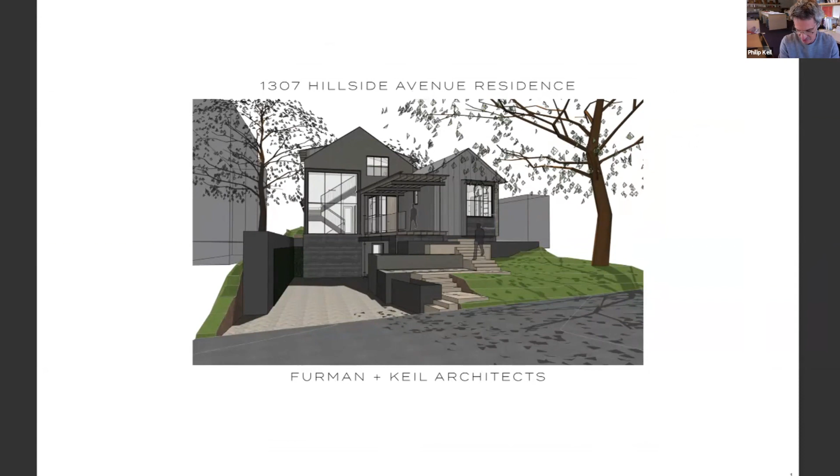This was a special project for us, and I'll introduce our team and then let Drew and Troy take over. Mark Whaling with, you guys probably all know Mark because he's been a long time advocate for and supporter of AIA Austin through his company, Austin Concrete Development. In fact, I got to know Mark through AIA Austin, and he ended up hiring our firm to help him and his wife design a house over in Travis Heights on Hillside. So today we're going to be talking about that house, really talking about the design genesis of it and all the crazy forces at work in the constraints, particularly the very constrained urban site.

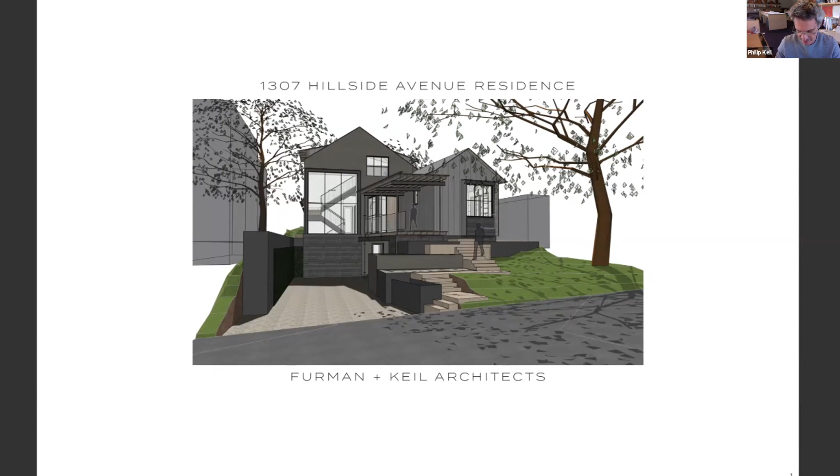But we'll get into that in the presentation. I really need to give Troy and Drew props on this. Troy and Drew from our office really took the lead on designing this house, making it really sing, integrating with our amazing consultants, including Sam Covey from Fort Structures, Blair Burton Interiors, and Jose Corea from Austin Outdoor Design. Them paired with Mark and Rosemary, fantastic clients, really made for a great project, very integrated on a very challenging site.

One note about our clients, because they're kind of the reason we're all here. Mark is unusual as a client for us because he's a colleague in the trades industry, being a tradesman, he kind of knows the construction industry. He was not only our client for this, but he also acted as general contractor. So I'm sure you guys will have interesting questions for him as we get into it.

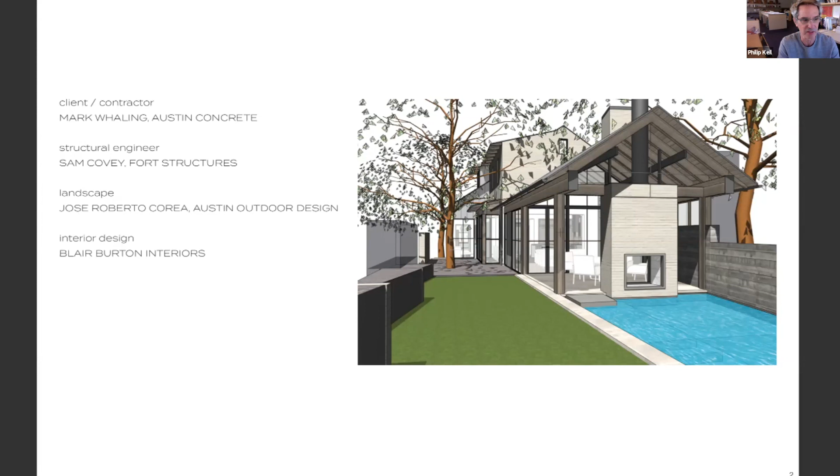Thank you. Our clients have been looking for a perfect spot to build for a long time. They had lived in Toronto and wanted a location that had an urban context, but still felt like a neighborhood. They also wanted to be able to walk out the front door and be at shops and restaurants within minutes. And when this lot on Hillside in Travis Heights came available, they moved quickly to get it.

It had an existing small bungalow that was removed to make way for new construction that would take better advantage of the lot size. This starts to show the feel of the neighborhood with the tree-lined streets and smaller older homes on irregular shaped lots. There are several new builds mixed in as well. Notice the wedge shape of the lot as it narrows from the street to the back, and it also rises several feet in grade from the front to the back as well.

This slide shows the challenge of the context of the neighborhood. We have a smaller, older bungalow to the right of the property and a large new construction to the left of the property. We really wanted to find a strategy that split the difference in scale and still fit in the neighborhood.

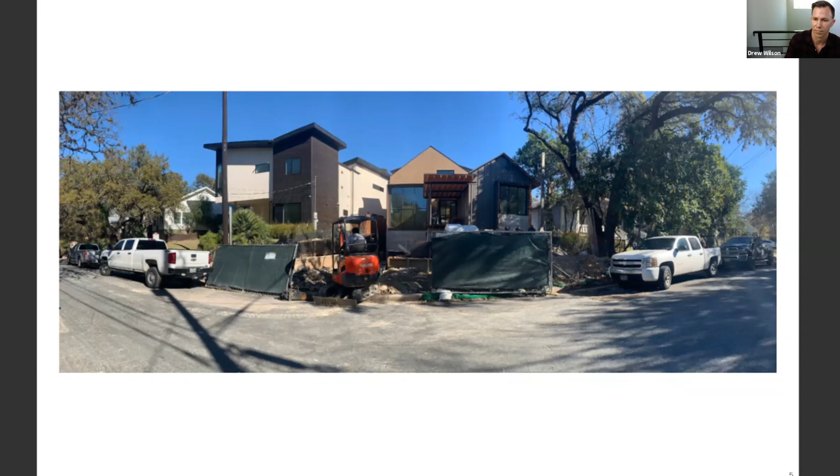My name's Troy. So when we were starting the design, Mark and Rosemary came in and really said, we want the master bedroom on the back, the private part of the lot. We want the living spaces towards the front of the lot that can engage the streetscape.

So we started looking at all the overlays that you get on these urban lots. The second constraint we had is that there's about 15 feet of rise across from front to back as this lot narrows towards the east. And how do we take Subchapter F and all of the overlays and zoning and max out this lot?

Another thing the clients were looking for was not necessarily a traditional house, but some of the traditional elements that make an older neighborhood like this, and the bungalow to the south, part of that streetscape. Ideas of front porches, exposed eaves, gable roofs, not flat roof structures.

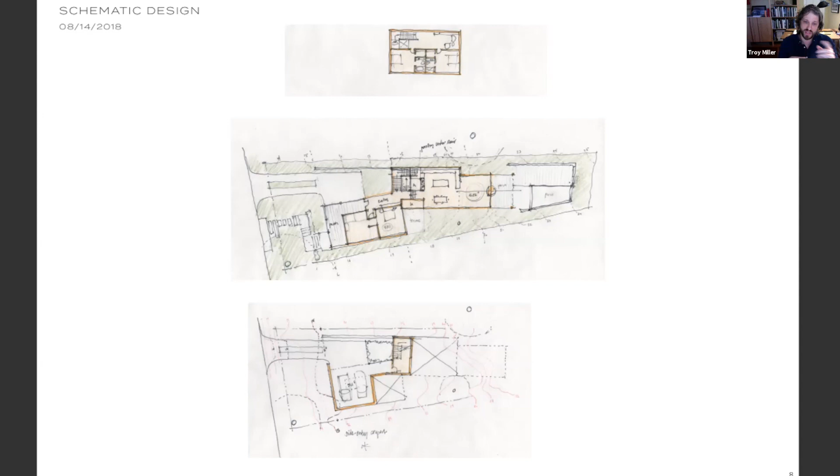The next step was looking at how we're going to mass this structure, and whether there are ways to clean up the geometry so they're a little more integrated - where before it was two orthogonal structures oriented to the two divergent property lines. Can we take those two geometries and start weaving them together, which is what we started to do here.

As we went through this process, let's go to the next slide, which is just the upper level, starting with this cut-in basement level.

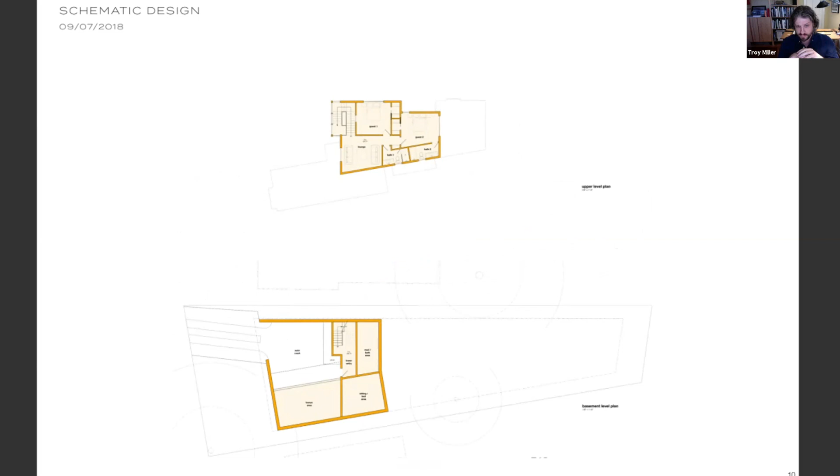So how do you start to layer this structure and use those different elements, not only horizontally in plan, but vertically, and tie them together. Let's go to the next slide.

And the goal was that from the street side, it really is perceived as a 1-story structure, that master wing moving up the hill to this reconstructed front porch.

It's on the front of the house, but it doesn't necessarily face the front of the house. It brings you up to an entry that's very clear, even though it's 10 feet out of grade at the street from the streetscape.

And also, this will become more apparent as we look at the 3D, we have these walls that are vanishing to a point towards the back of the lot. And how do you put a roof on that gable roof structure and make it feel like those older houses?

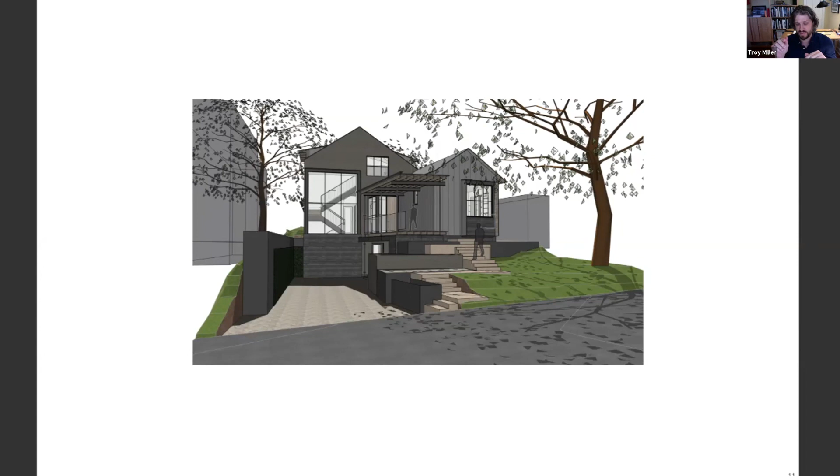What we found out as we were modeling this is, if you just keep the plates the same, these roofs can crawl and become gables that come out of gables, and your ridge line ends up sloping, but you really don't ever perceive that as you're moving around the house. So in a lot of ways, it feels very regular.

And that allowed us to achieve, if we look at the left of the page, that lower roof gable of the master wing comes and really slides up into that larger gable over the 2-story structure.

And then within Subchapter F, starting to use all the tools of dormers and what those are allowed to do, to slip it under the tent.

The other element that we were trying to do is keep the mass of the house in the center. And as we move out to the places where you exist outside of the house, the structure becomes a one-story element that's at a much more human scale.

So when you're up against it, even though part of the structure is 3 stories and a very large volume, when you're outside, when you're engaging the house in the spaces within, you never really feel that, except for maybe the one point at the stairwell, which is really that vertical connector through the house.

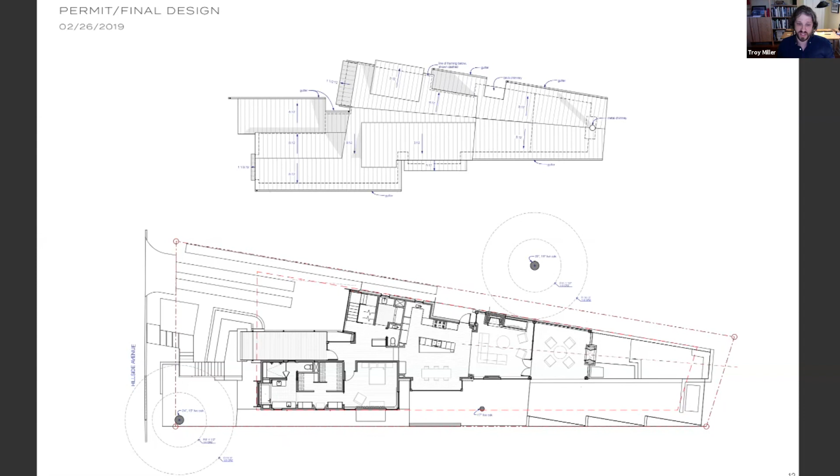And as you can see, as we went through this process, the basement actually allowed us to add additional elements as we moved through. So the program became even bigger when we got to this point.

Just by twisting the building into the regulations, particularly the basement relief from FAR, allowed us to have a guest room, a storage area where we contained all of our mechanical equipment, a bathroom if you enter off of that sunken level, and even a media room on the upstairs level for the client.

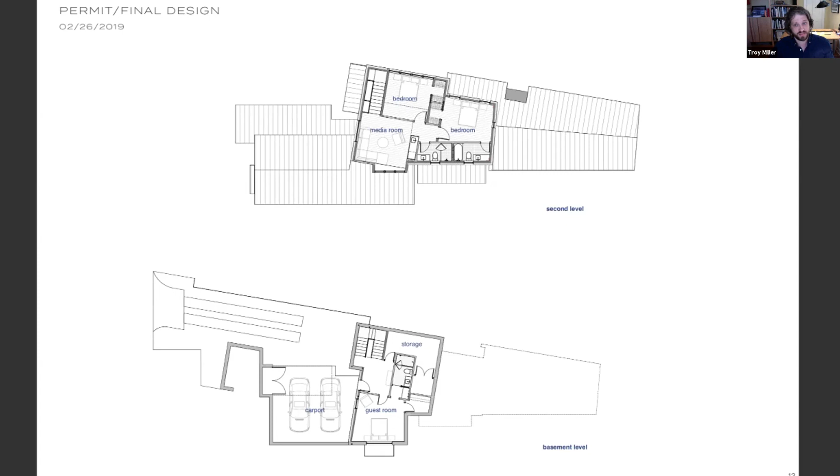And if we go to the next slide, this shows the tent and how we slipped all of these structures underneath it.

One idea was that as we got into this upper structure, to keep the scale down, we really use again those gables to reduce the additional size that the 3rd level adds to the project, by breaking it down into dormers, and it being fully functional, but it has a little bit of it slipped into the attic, even though we weren't using the attic exemption for FAR.

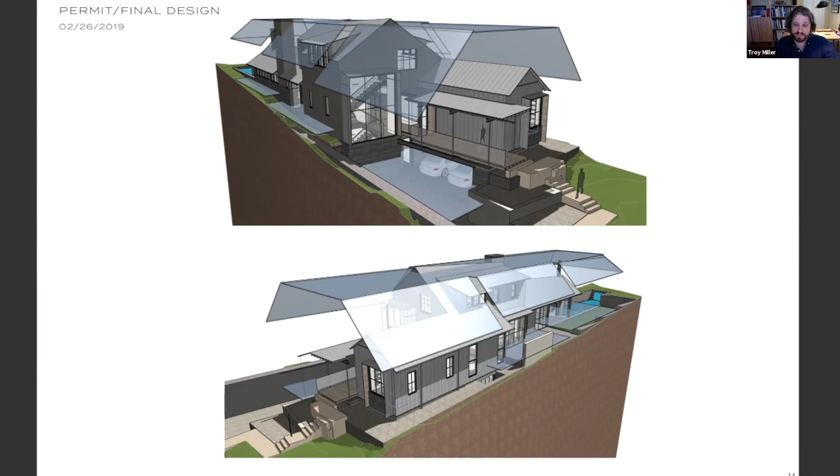And you can also see in this slide how it lays out the square footage we were able to gain really by using the basement exemption, from an allowable square footage which was right around the 2,800 to 2,900 square feet of FAR per building permit that we had.

Really, the house itself has, in that 3,600 to 4,000 square foot range of interior conditioned space, that is really what people want out of these urban lots, I think, just because of the cost. It's really hard to get all of the function and programming they want out of that structure.

This really shows how we stepped up the lot. We ran into a bunch of issues in terms of how basement is calculated, how tall the ceiling heights can be on that lower level, and still get that continuous main level from the master all the way out to the living room and the outdoor room, and how much we wanted to cut on the high side of the lot. So through discussions with the Whalings, they gave us 2 steps.

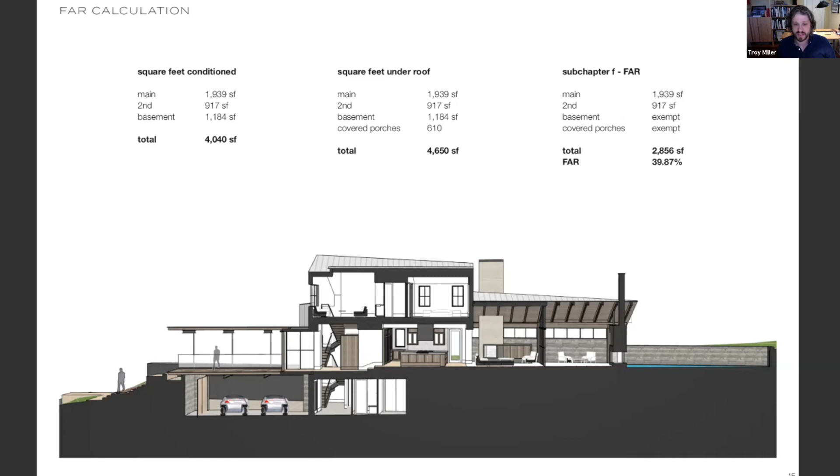If you want to move on to the next slide - this sort of shows that stair as the circulation volume, how we tucked it in on that upper level where we had some low plates, but it still provides, I think, some nice and interesting geometries.

These geometries are cleaned up just enough that the house feels comfortable, and you don't necessarily perceive the craziness created by having the walls that splay towards each other and the dipping ridge lines.

Just to the left of the stairs, the entry door - part of the issue was getting people past the master, and once you enter, you sort of see all the way back through the dining room, through the living room, out to the outdoor room, even to the pool. So the natural flow is to move away from the master suite.

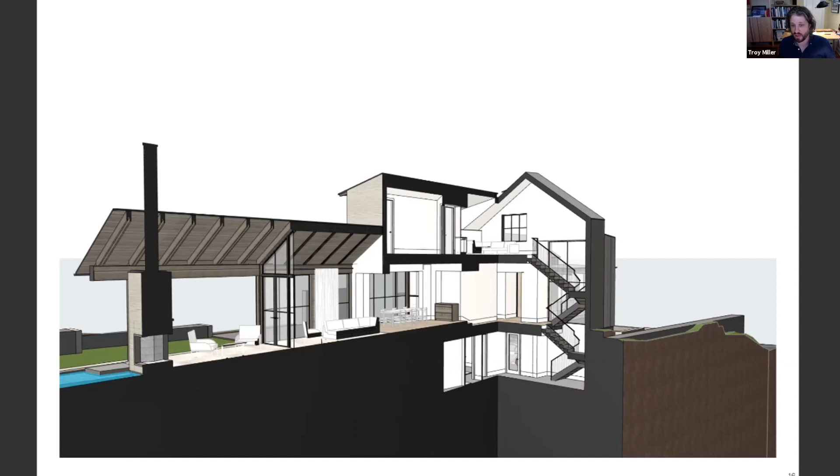Again, this maybe shows a little bit more of the stepping down of scale as you get to the back of the lot.

Really, the living room and outdoor room are one part of the mass of the structure that drops down to sort of a one-story pavilion. So when you're outside in the pool or in the smaller yard to the south of the structure, you're really just next to this one-story building.

Ideally that's a very comfortable space, where with all of the glass on the living room, that whole area feels like one space.

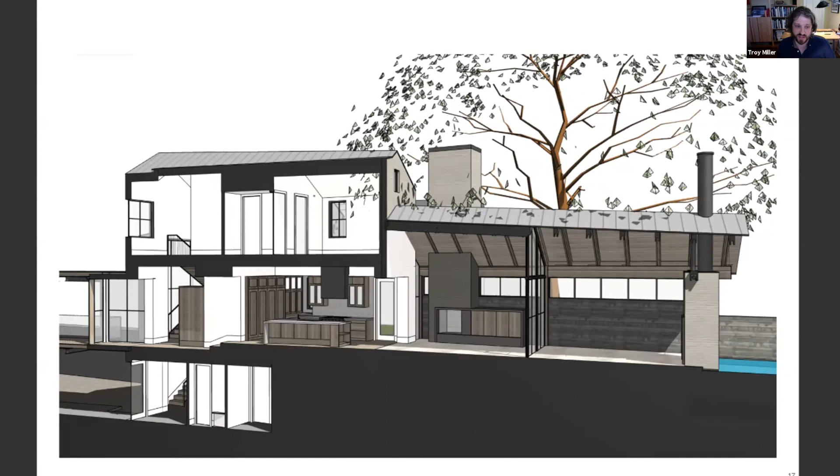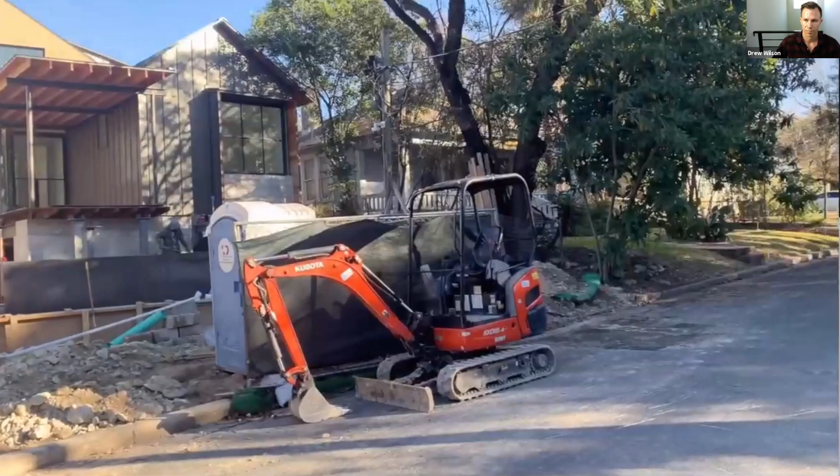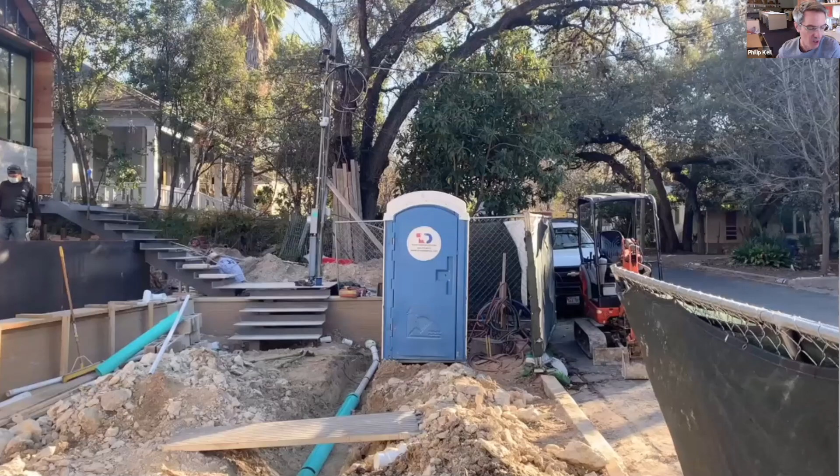That house right there was on a homes tour a couple of years ago. Here we are on Hillside Avenue, with the steps leading up to the front porch and the driveway cutting down into the site to the carport.

This is the front porch entry, which is up off the street, 7 feet.

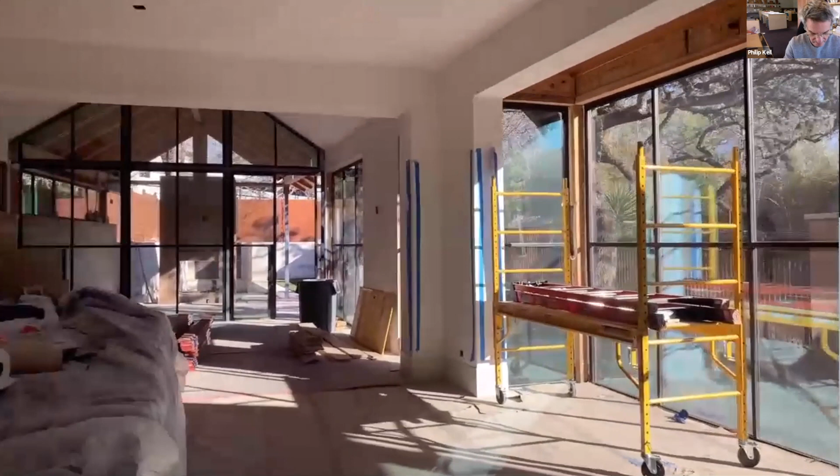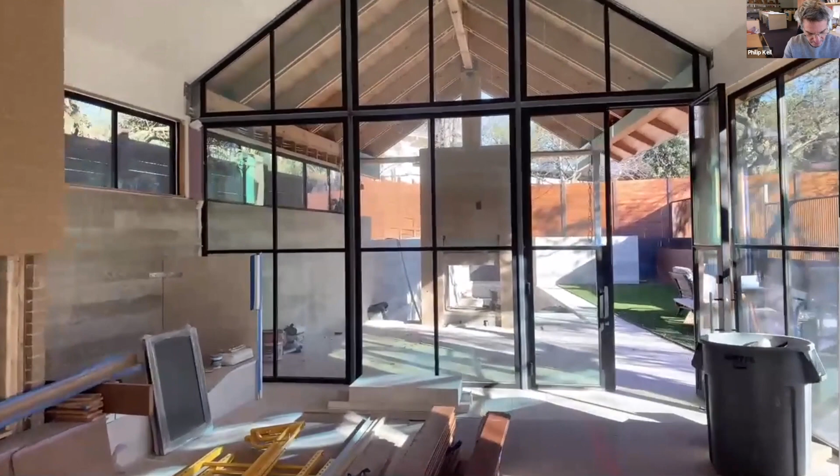This is the entryway, which leads into the dining room and the kitchen, then into the living room, and flows out to the back porch, backyard, and the pool.

And this is the master bedroom, and the master bathroom.

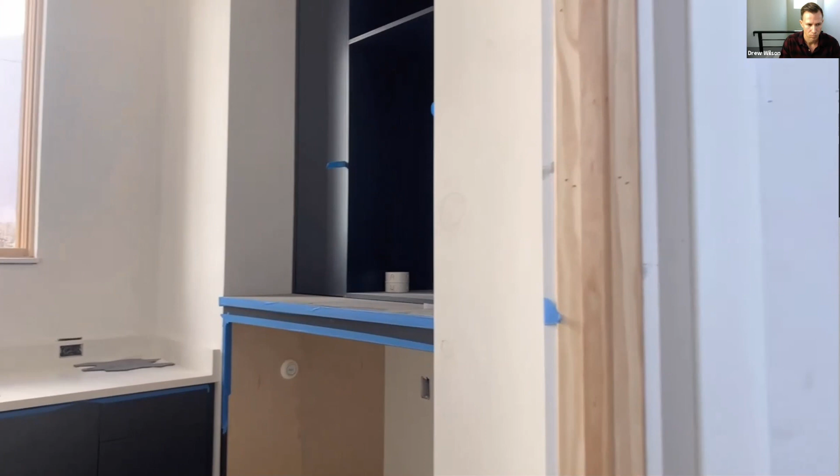To the laundry room, powder room, coat closet, and then there's the stairwell that goes from the bottom floor all the way to the second floor.

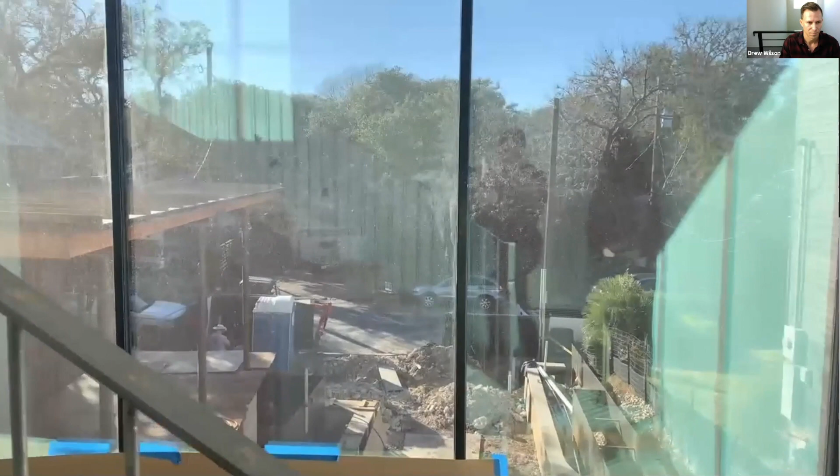The second floor has a small media room with a wet bar, and 2 bedrooms and 2 bathrooms.

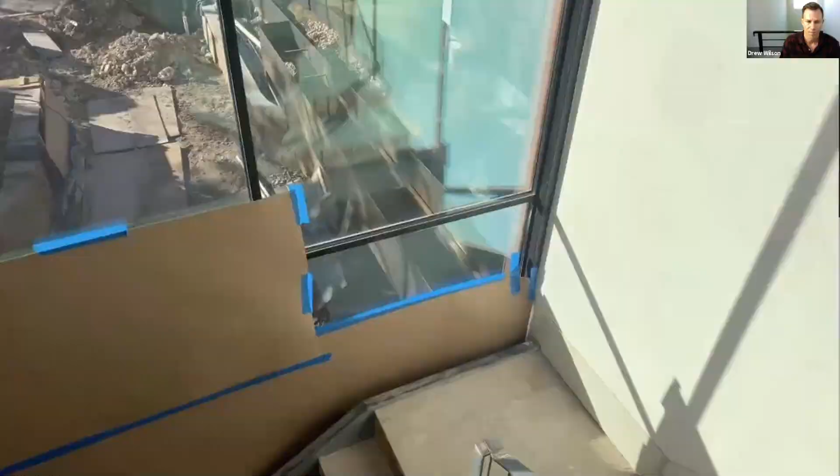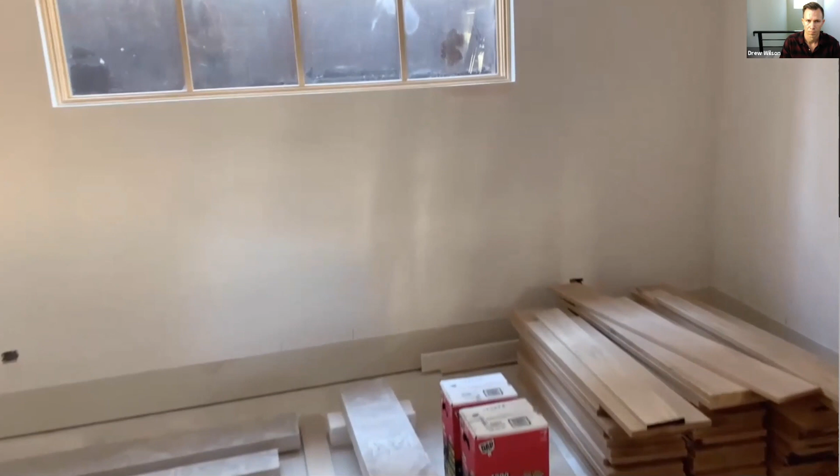We are back at the main level now and going down to the basement level, where there is a large mechanical room, an additional bedroom and bathrooms. From this level, it leads out to the carport.

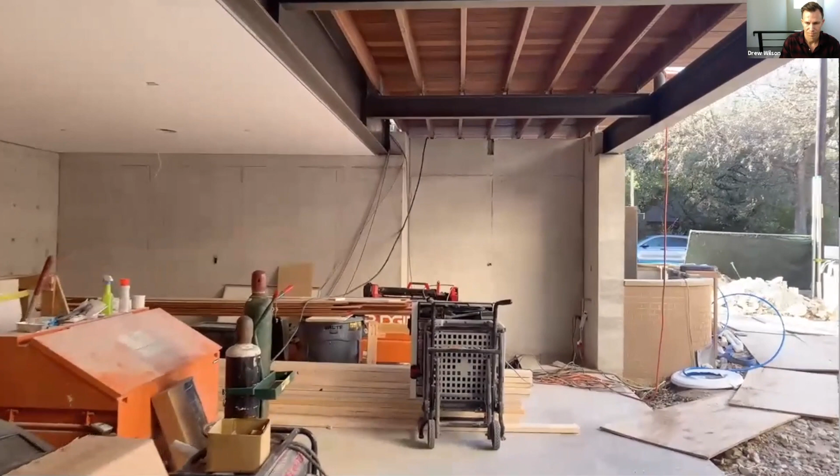Our next video is Sam Covey from Porch Structures, and he's going to talk a little bit about the complexities of the structural engineering.

Hi, I'm Sam Covey, structural engineer from Porch Structures. I had a fun time working on this interesting project with Mark as the owner and builder, and Furman and Keil as the architect. There were a lot of interesting structural challenges.

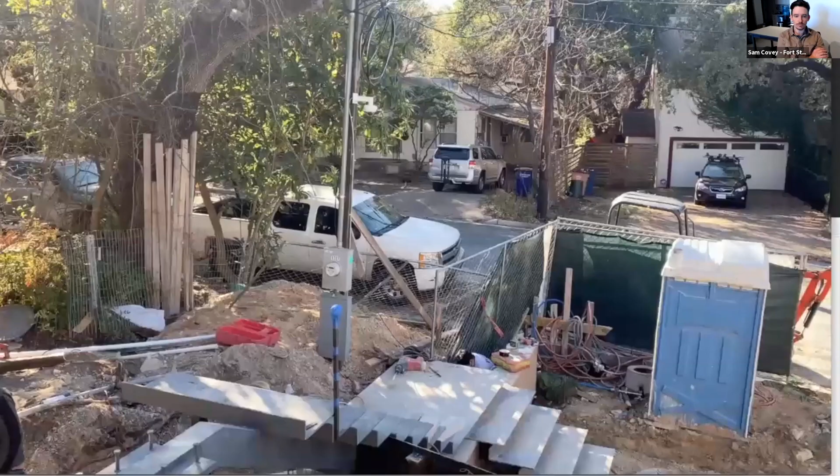Here you can see an exposed steel staircase, and if you notice, the stringer is off center from the treads. That's due to staying out of the critical root zone, which we all have to deal with because of the City of Austin critical root zone regulations. It's always easier to stay out of the half critical root zone instead of in it, so part of this decision was to offset the structure and cantilever over the critical root zone instead of doing an air-spaded pier within the half critical root zone.

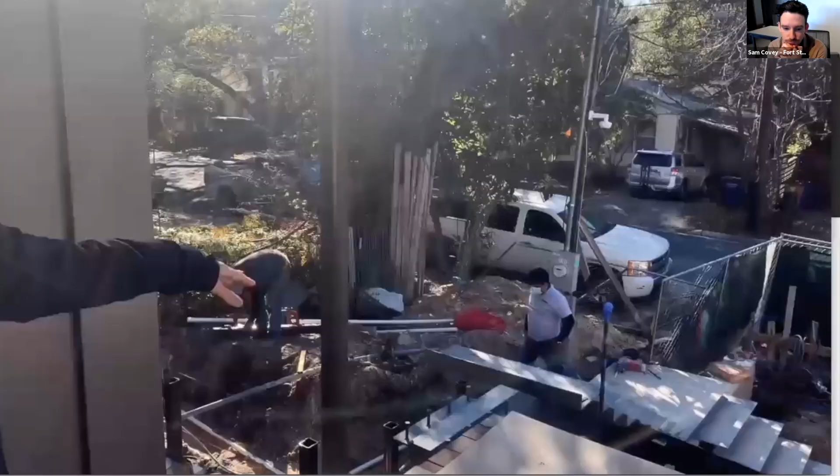Another interesting aspect of the stair, which isn't built yet today, is that it'll be all concrete, floating, formed up over a steel embed plate. If you look here, it's basically an upside down steel base plate pointed up, because they're going to form out the concrete and pour it on top of that to give the step a floating look.

Our next video is of our client and general contractor, Mark Whaling, who's going to share some of his experience being both client and contractor.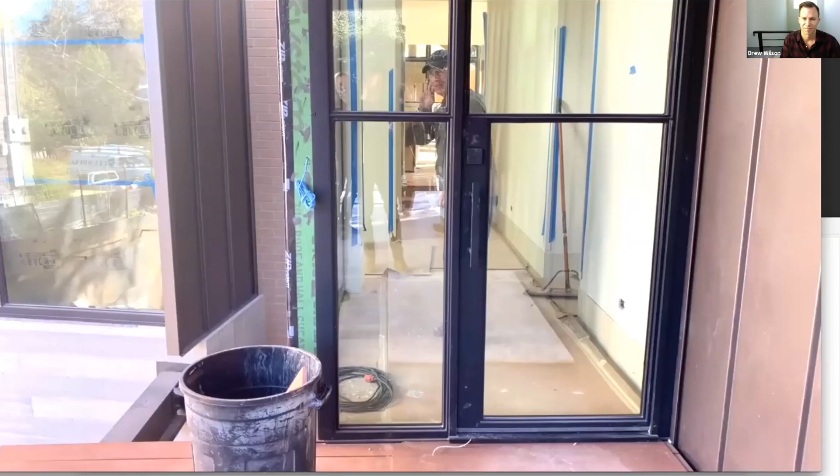I'm Mark Whaling, and I'm the builder on this project. It's been a labor of love with Troy, Drew, and Philip. This is my personal house. My wife and I have been planning this build for about 3 years now. It's been that long, time flies for sure. From a client kind of builder perspective, I think this build has been maybe a little different than what other builders and architects who have a client experience, because you're the client as well as the builder.

What we were able to do, I think, in a shorter period of time, is to compress the initial month or two. From what I recall, we really flipped this entire program around completely, as you may see in some of the other materials that Drew and Troy and Philip put out there. Super thrilled with how it's come together. The thing of it is, it's kind of terrifying in the moment because you never know what's a great idea or what's going to end up being a throwaway idea. And it's incremental, right? As you're into it, it's just incremental.

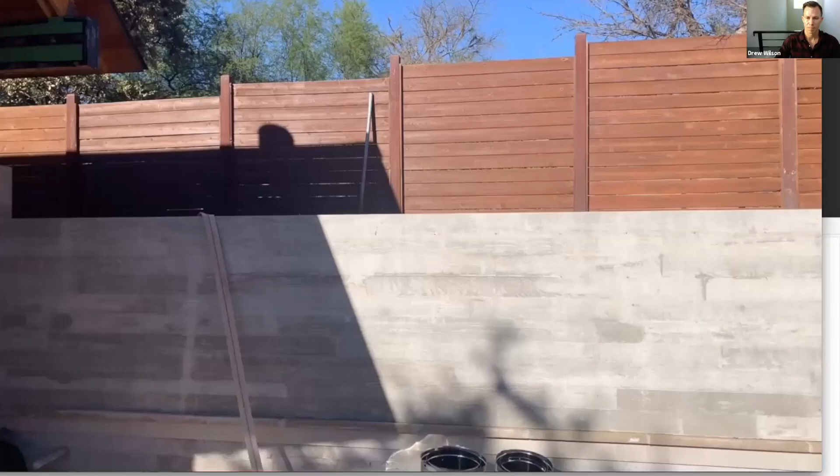Hi, I'm Rich Ponce, and I'm with Austin Concrete Development. I work with Mark Whaling, who's the builder and owner of this property, and who is also my business partner. We performed the board form concrete walls and the slab on grade, but from an architectural perspective, these board form walls...

Were designed based off of the inspirations and visions of Mark and his architect, Philip, at Furman Keil. What we've done to execute these walls is a pretty basic process of selecting a fir 1x material, which we sandblasted in our shop to execute the grain showing more on the finish. We use fiberglass ties, which conceal the wall tie systems that some prefer not to see, so that the wall looks clean and you don't see those ties. Then we made sure we executed our mix designs on these walls based on the time of year and the temperatures.

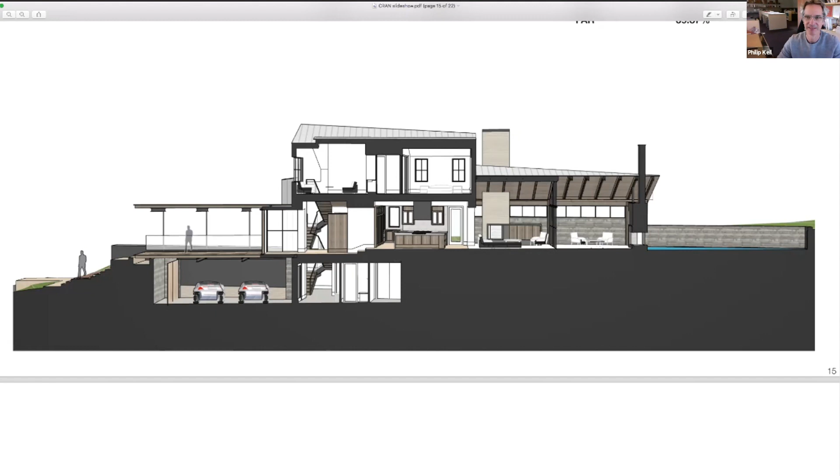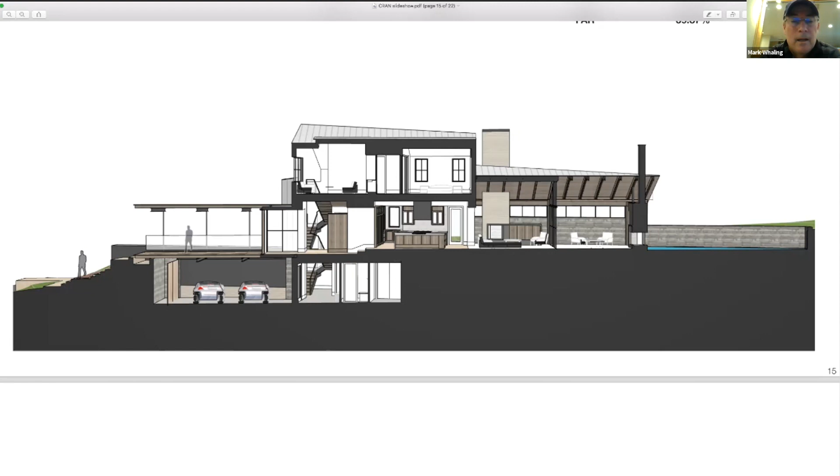If I could add to the earlier question, for the next project we're probably going to try to find a lot that's on diggable soil, because this entire lot from curb to back property line is limestone, some of the hardest limestone our company has encountered. We've been doing projects here in Austin since the mid-90s. So the home is certainly on solid ground, but we took about 130 truckloads of material off this site in total. And yeah, that was effort. That was effort.

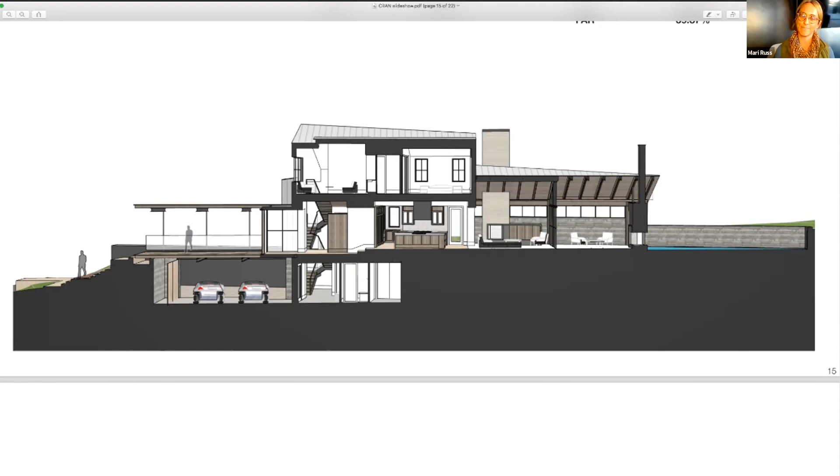Thanks, everyone. Thanks, Mark. Okay, Troy, Drew, thanks. Thanks, Philip, AIA. Good job, great presentation, thank you guys. Thanks, Chris. Mari.

Do you have any idea how we can get CEU credit for this presentation? Rob typically emails right afterwards with your certificate. It might take a day or two, but he should email you. Okay, thanks. Yep, you're welcome.